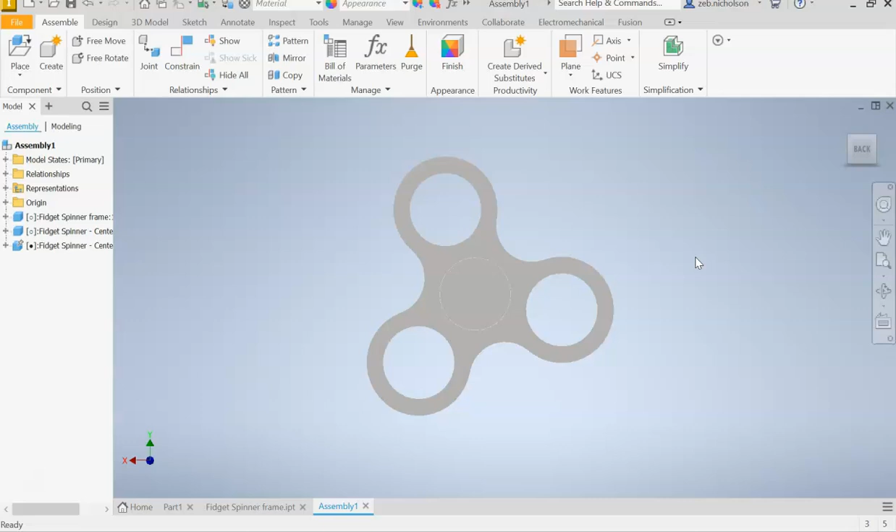So honestly, whether you're in this 8th grade class or not, still worthwhile to watch and kind of learn how to put things together, how to make this specific fidget spinner, and so on. But in fact, this spinner specifically is the model from our 3D printer. We have a Dremel 3D printer, and when you first buy them, they have preloaded models you can just print. You don't have to design, upload, and that. One of them being this fidget spinner here.

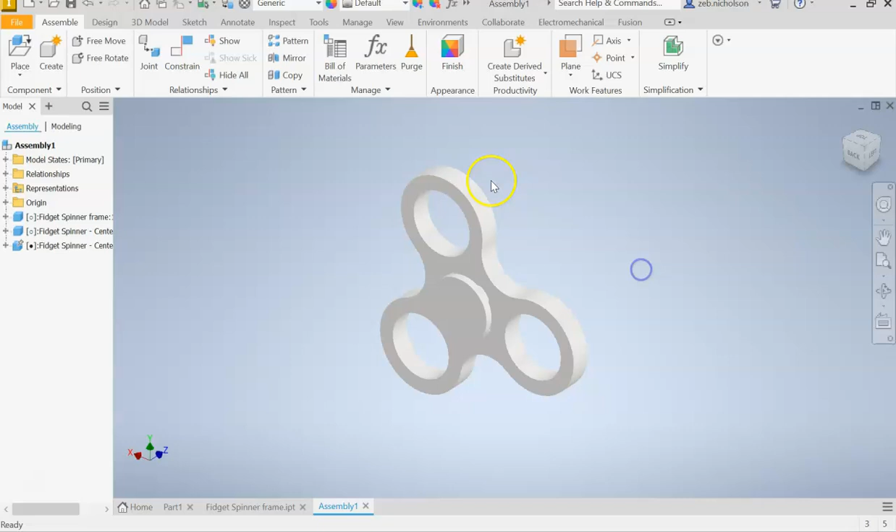So what we're going to do is we're going to teach you guys how to design and make these on the model software here, but once we're done modeling them, we should be able to put them back in the 3D printer and print yours to take home. So there we go. We will start again by showing you the final model here. There are 3 components. There's the 2 inner pieces that snap together in the bearing, and the piece here. I'm not going to model the bearing. That is an off-the-shelf part that we will not be needing to model up.

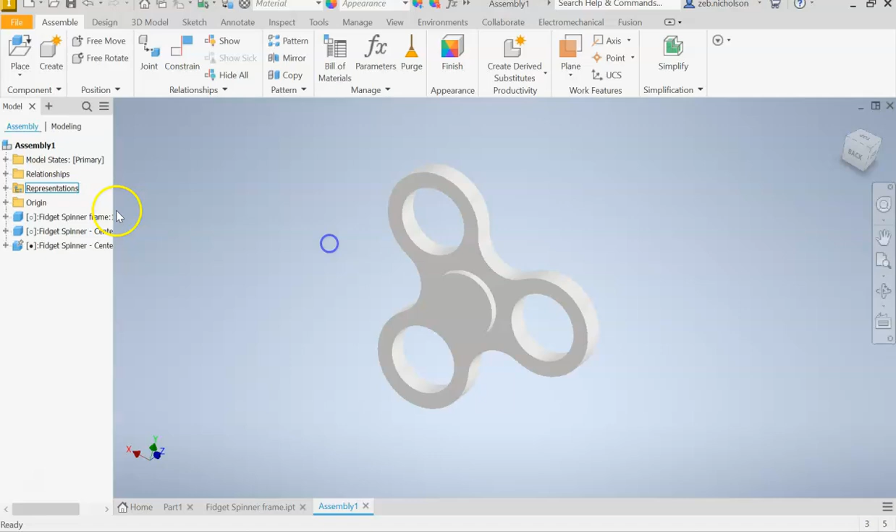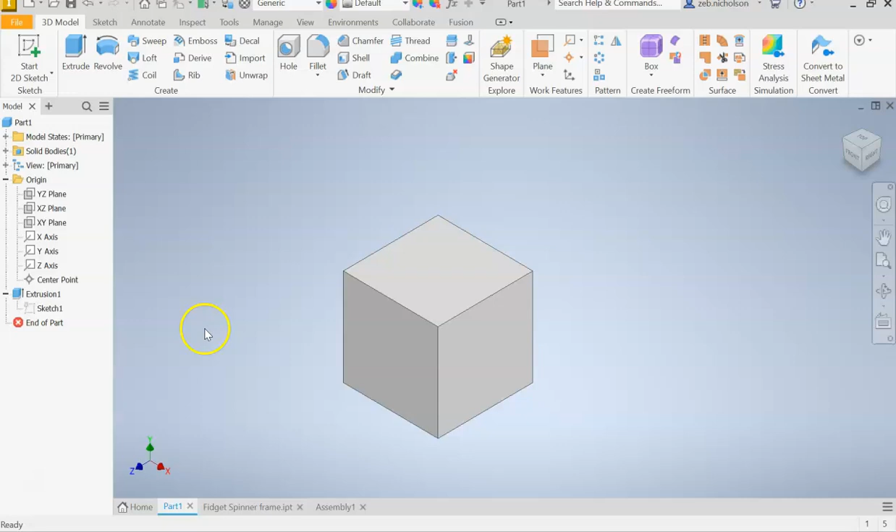So getting started. First thing, you are going to be in your home screen, and specifically for this fidget spinner, we are going to create 3 different parts. The assembly is made up of fidget spinner frame, centerpiece 1, centerpiece 2. So we need to make those individual parts. So to do that, let's go ahead. We don't need to save that. We'll go back to our home page. That's where you can start. Again, there's lots of ways to do this, but we're going to start a new part. So I'm going to go up here and start that.

When you start a new part, the first thing you always need to do, anytime you want to add new features, you need to start a sketch. So we're going to come up here. Mine is already start 2D sketch. So if yours is not, you want to make sure you can go back to 2D sketch. If it is, you can just click on the icon. If you click on the drop downs, it'll only give you options. It won't actually do anything. So make sure you hit the icon up above.

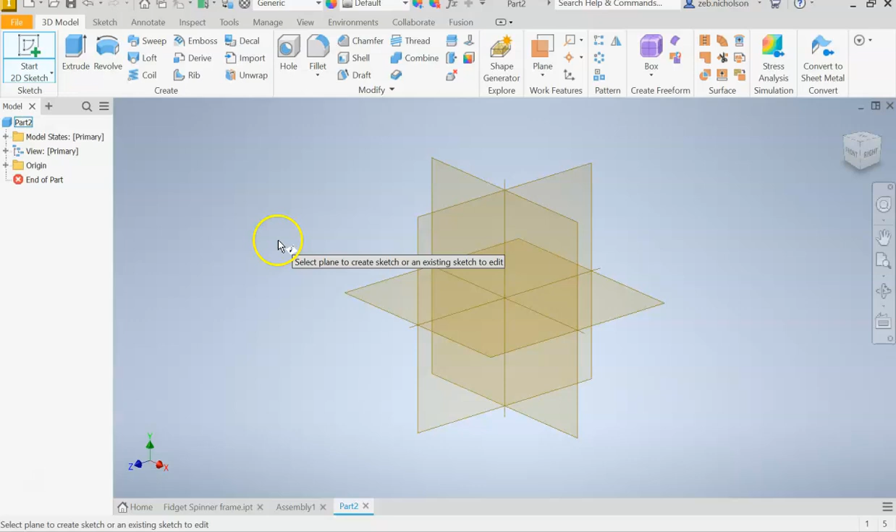From there, we're going to choose an XY plane. I mean, you could choose any of the 3. We will start with the XY plane because, for example, if I wanted to start a circle, it's going to ask me my center point. If you notice the X and the Y coordinate values, this is your traditional Cartesian coordinate. So I'm in the upper right, the first quadrant. You'll notice my X and my Y are positive. If I go to the second quadrant, my X is negative, Y is still positive. If you were to choose a different work plane, the XZ or the YZ, those can get a little bit more confusing simply because the values don't necessarily line up with what you're used to.

So when we go ahead and start this fidget spinner, before I do that, I want to show you how I built the frame. So I can actually go up here and remove all the components. The order in which we do this is we will create 2 different extrusions, but we're going to use what's called a circular pattern to create the symmetry. So I'll go down here. My very first extrusion looks like this little figure 8. And I made the figure 8, the whole thing with dimensions and numbers.

But you'll notice the next command I use over here on the left side is a circular pattern. So in coming down, hold on, I gotta minimize that. And coming down to that pattern, you'll see that it actually took and patterned that top circle 3 times. Once I do that, I also notice that it's a bit of a harsh corner here. So I want to soften that corner up and fill that in with some material.

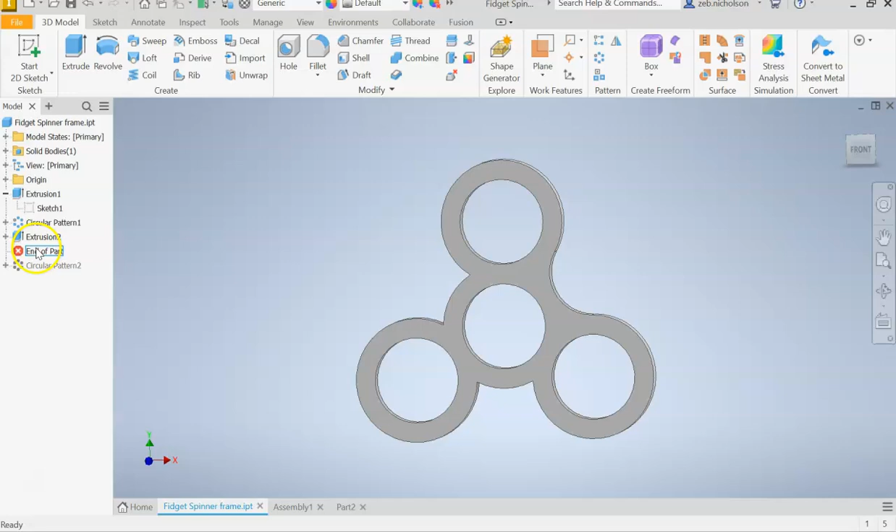So to do that, I just add another extrusion. You'll notice that extrusion was only on this corner or set of corners here. And the last thing I did was I patterned that additional material, and it kind of softened the whole thing up. So let's see, let's go back then, part 2.

Again, what we're really trying to get at is extrusion 1 here. So we want to make that. To do that, I'm going to start my very first circle. All these things are going to be based in circles. So my very first circle, I like to snap it. With that green dot, it means it's exactly on a special point. In this case, it's the origin.

So when I select that, I open that up. This is going to be the opening of where the bearing goes. So I've already taken the liberty to measure that. And that opening, again, as I create sketches, I click on it once. I click on it the second time there. I did not tell it what dimension, because I'm going to go up now to the ribbon.

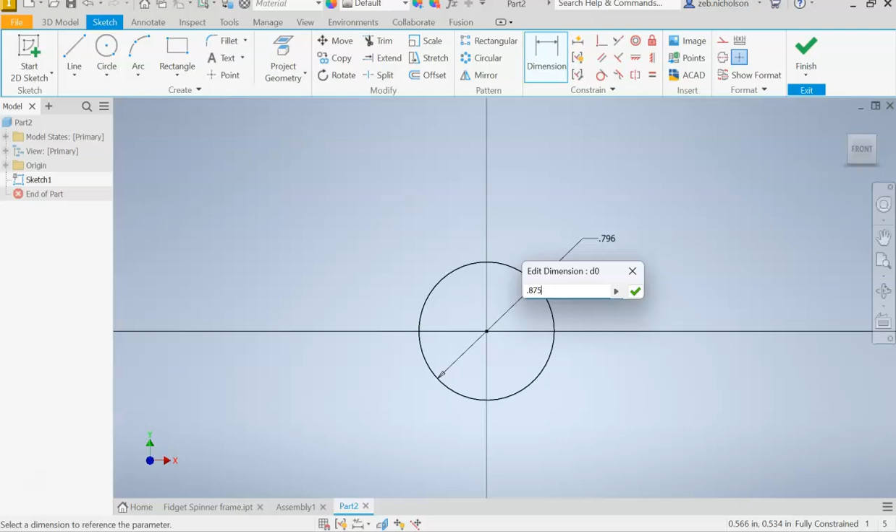Click on dimension. I click on the circle, and then I come out here a little ways off. I click one more time, and it asks me for the dimension. For us, that's 0.875 inches. Now, unless you've gone in and altered it, the default for our system and our computers is US customary and inches. So I just have to type in the number, it assumes inches. So with that said, we have our first circle.

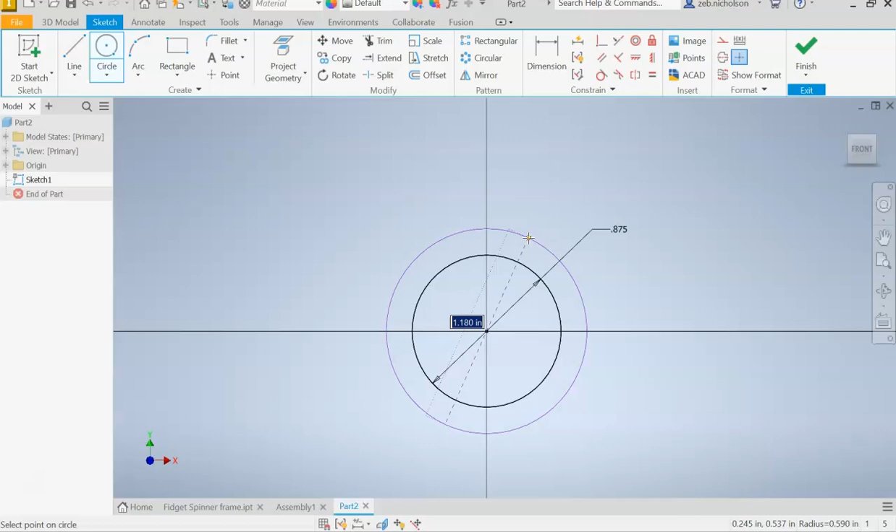What we need now is the wall thickness, right? We need something that's a little bit thicker to create the actual wall thickness of my fidget. There's two ways to do that. Now I can come in here, I can make another circle, and I have to go in and dimension it. Well, I know that I want the wall thickness to be 0.2 inches all the way around. Okay? To do that, that means I have to do some math. I got 0.875 plus 0.2 here and another 0.2 inches down here.

I try to make my own life easier when I can. So I'm going to teach you another command. Up here on the ribbon, hold on, I'm going to go back and delete that circle. On the ribbon, I see in the modify section this offset command. If you choose offset, here's what you're going to do. If you select an existing sketch, so for example, I click on the circle, and if I move out, the dimension that it is giving me is actually the dimension of how thick of a wall that I'm creating, the distance between these two items.

So while I'm moving, I don't click yet. I can simply just leave my mouse, go to the keyboard, and I want that offset, which we know is our wall thickness of the fidget. We want the offset, I said, to be 0.2 inches. Hit enter, and it'll give you the wall thickness exactly as such. So there it is down there.

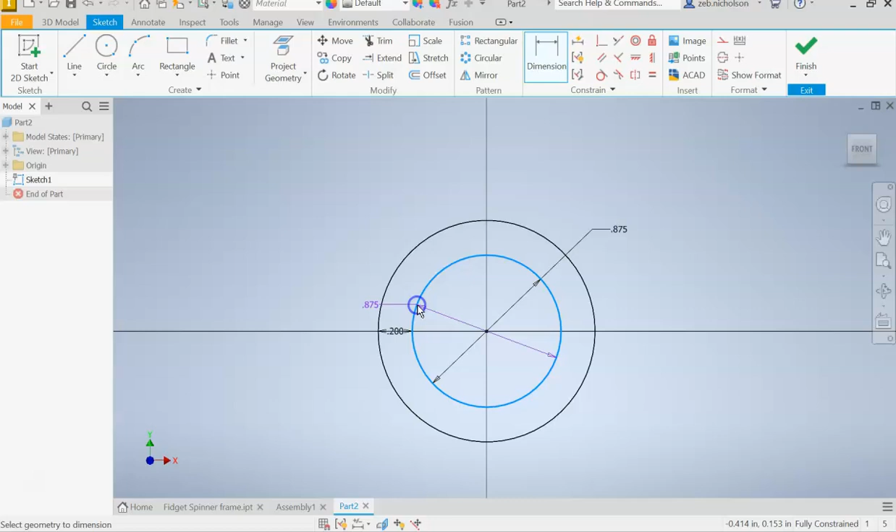Okay, so I can dimension that if I want. I can click the dimension, the inner circle to the outer circle. It will ask me for that dimension. Now, when I click, it says, hold on, adding this will over-constrain. What that means is I already have 0.2 inches down here as a dimension. So I do not need to add it a second time.

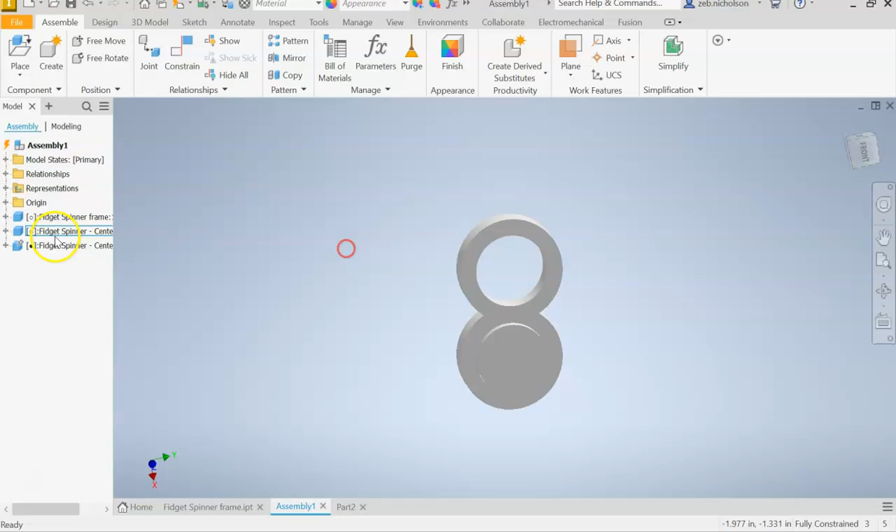All right, so I have my first fidget, my center circle, and I know from my assembly, actually, let's go to this far right there. I'll go to the end. I know that from this circle to this circle, remember when I did that? When I created it, I created circle 1, and now here's my wall thickness. Here's circle 2 up here. All right, so we need to figure out how far away is circle number 2.

Well, if I go to the circle command, come up here, I just need to make sure that it's centered on the y-axis. At this point, I'm not as worried about how high up or down. We'll come back to that. So I'm going to click out here in space, and I'm going to click again. I'm going to dimension that circle, also click one more time. It lets me edit. I'll make that the same, 0.875. Okay. I will then also offset that circle by 0.2 inches.

I'll let everyone get caught up here. Pause, rewind, go back, do what you need to here.

But right now, what I'll say is I know that I've set the sizes of these circles, but check this out. I can grab this circle, and if it lets me, oh, there it is. I gotta grab the center. I can't grab the edge. If I want, I can move this circle anywhere I want right now. It won't change the size because I've set the dimensions of that, right?

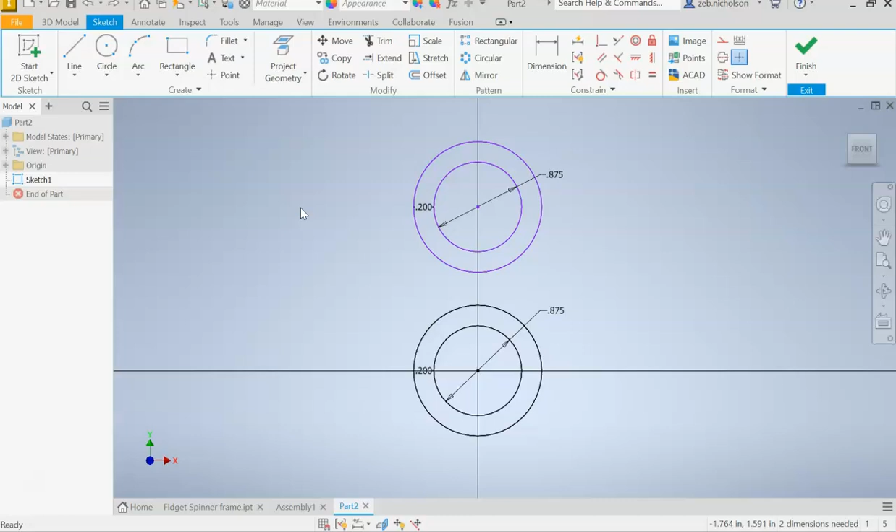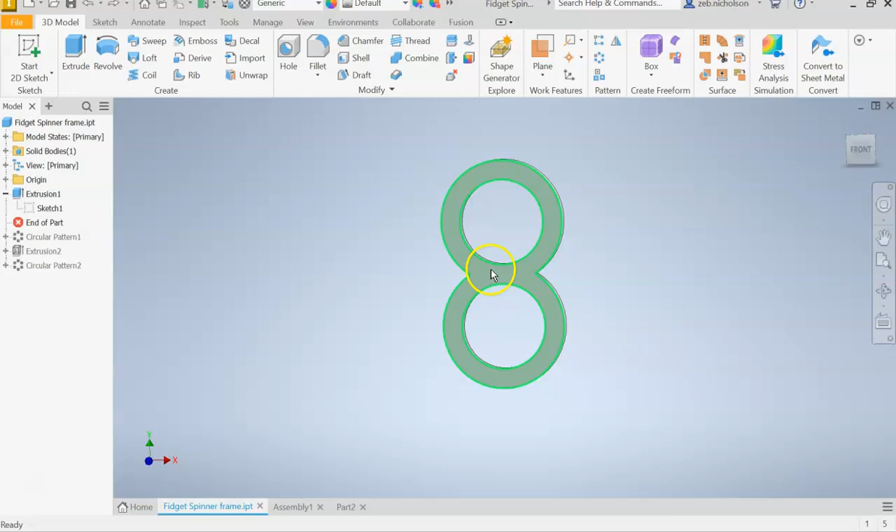All right, so back to my frame. How far apart is that circle and that circle? Well, let's see. I know that the ring thickness of my top circle has to come down and touch so that they overlap, right? The wall thickness of the bottom, the wall thickness of the top, they're the same. This distance right here is only 0.2 inches.

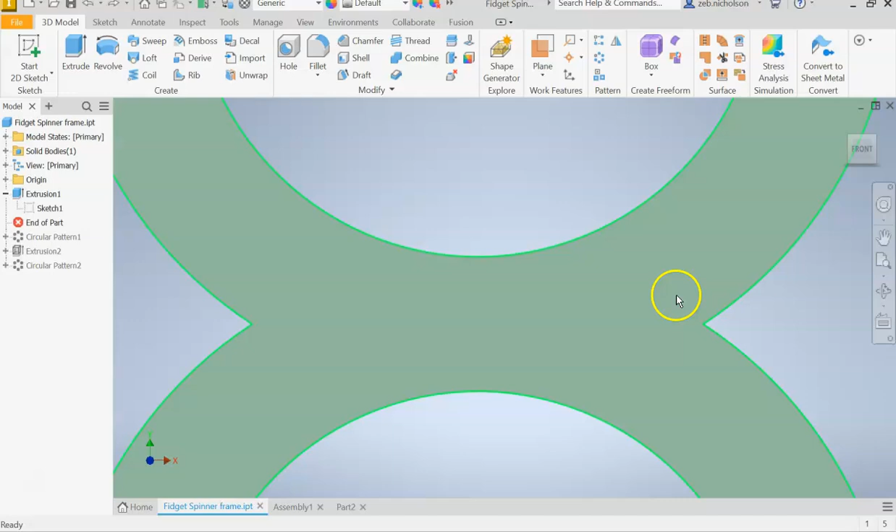So if I were to extend this green circle, it would come down and just touch that circle and then come back. Same thing with the bottom one comes up. If you were to extend it, it would just kiss the bottom of that circle and come back. So what I'm trying to do is I need to get this guy pretty much to come down like this. Okay, well, that's great and all, but it's not perfect. You can see that I'm not exactly spot on. So let's do the math.

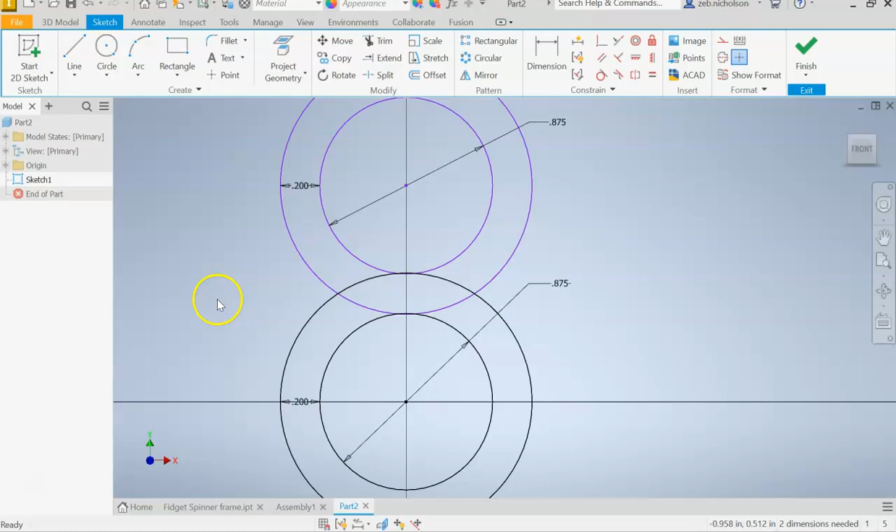What is that dimension? So if I want to add the dimension from this center point here, I click there and I click here. Now, I'll do that again. Dimension command, click from the center of this circle, click the center of this circle, and then I want to come out this direction, and I click one more time. Now, what that's doing is it's going to lock in how high up my top circle goes.

So how do we know how tall that is? Well, it's very simple. From the center to here is the radius of my 0.875 circle plus 0.2 inches. That's the wall thickness here. So I've got the radius of the circle, 0.2 inches, and another radius from the top circle here.

So if you really think about it, the radius here plus the radius down below gives me the diameter of a circle, right? 2 radii make a diameter. I know my diameter is 0.875. I also just have to add 0.2 inches to that. So the dimension from center of circle to center of circle is the radius plus the radius, 0.875 total, plus the wall thickness of my fidget, 0.2 inches.

When I hit enter, there we go. It's 1.075 to be exact. But the nice thing is, I didn't have to know that it was 1.075. I was able to just type in the math that I knew should work.

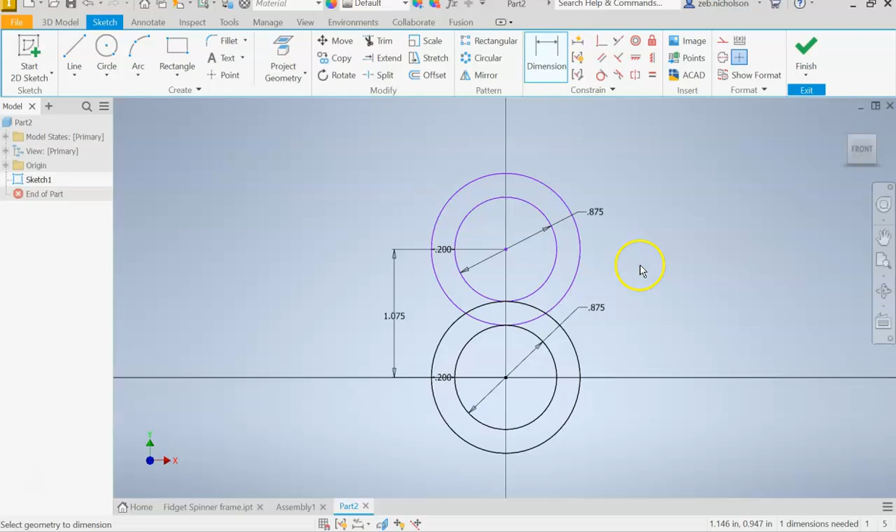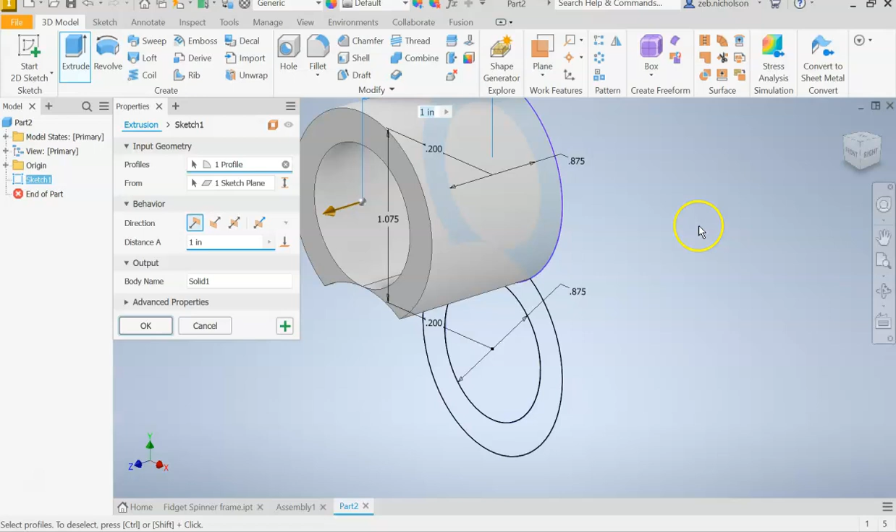Okay, from here, we have enough information. What I'm going to do is I'm going to finish this sketch. I'm going to zoom out a little bit. From our sketch, we're going to extrude. Now you can see all the green highlighting and what's going on. If I only choose and click that one green space, you'll see that the only thing that extrudes is that region, right? So the only region right now is that space.

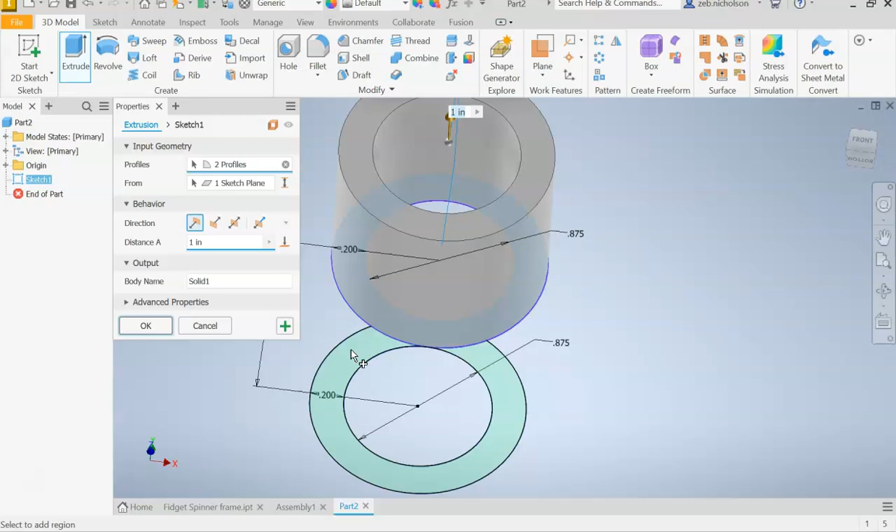Well, that's not helpful because I need more than that. The good news is I can just keep clicking. If I bring my mouse over here, I click on that, it fills in that circle. If I click here, it takes up the rest of that circle. So that gets us our thickness. We just need to change how thick of a distance. For us, it'll be 0.2 inches. 0.2 inches again.

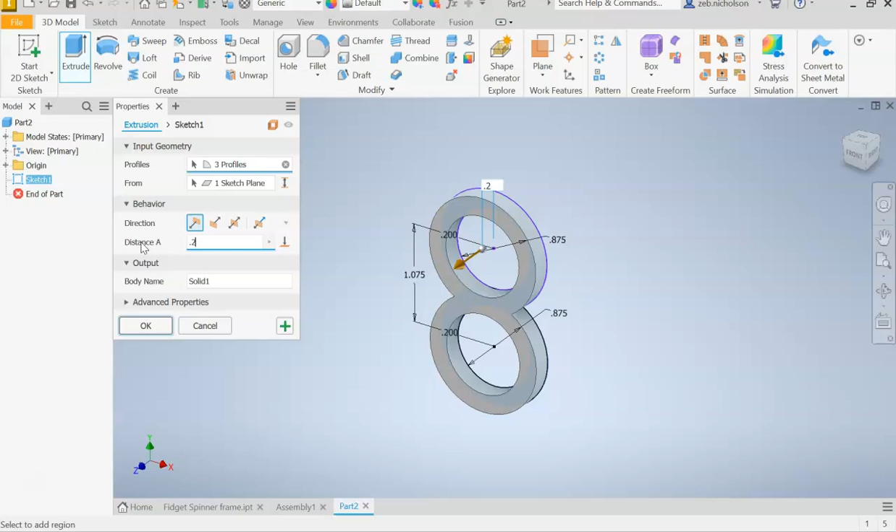So let's see. Actually, you know what? Before I do that, I can check this. I don't think 0.2 is right. There we go. So our thickness is actually going to be 0.275. I'm glad I checked that.

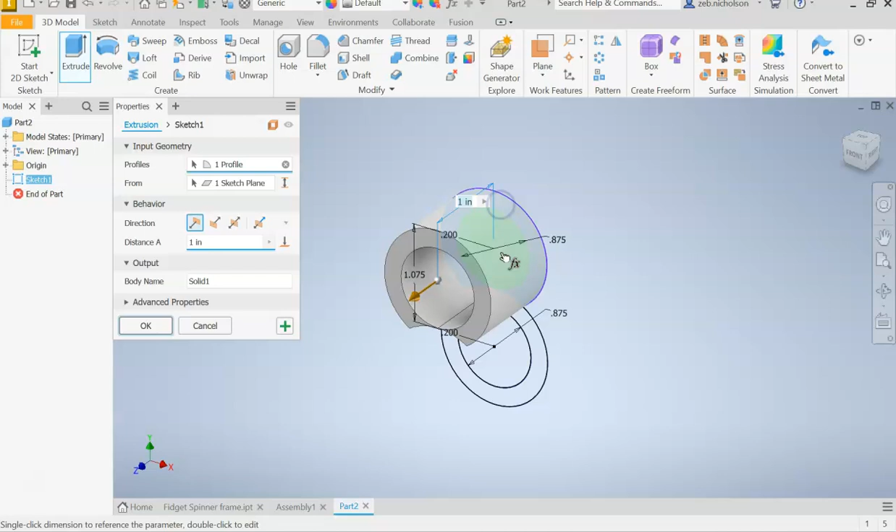So you're going to go to extrude. Good practice. We're going to go to this green region, that green region, and that green region. Our thickness, distance, 0.275. We hit OK.

And that will have to be the end of video 1, but we are well on our way. We've got a little bit of circular pattern, some filleting, and we are good to go.